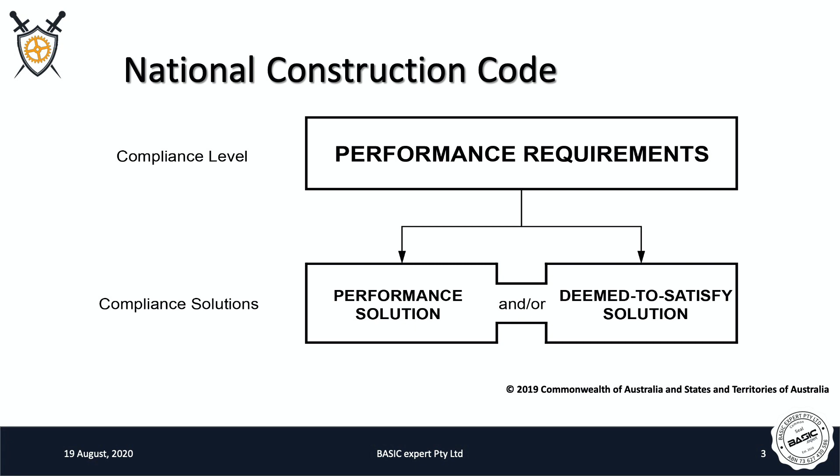Obviously, everything starts with the building code, and a reminder is not needed for this audience, but as you know, it's a performance code with performance requirements at the top, and you can meet the performance requirements either through a performance solution and or through a DtS solution, and that's the key of our discussion today. The performance solution either directly complies with a performance requirement or can be shown to be equivalent to the DtS solution.

Remembering that our whole topic is DtS safe, this could mean that a performance solution does not meet the performance requirement and is not safe if the premise that DtS isn't always safe is true. So that's an interesting thing.

Going back in time to the 1990s, this was the exciting time here. We had the second performance-based building code implemented in the world. The first was New Zealand. The UK beat both of us, but they didn't implement their performance-based code for a few years after us. We also introduced private certification. We got rid of the clerk of works. Those were exciting days and really the start of our current journey.

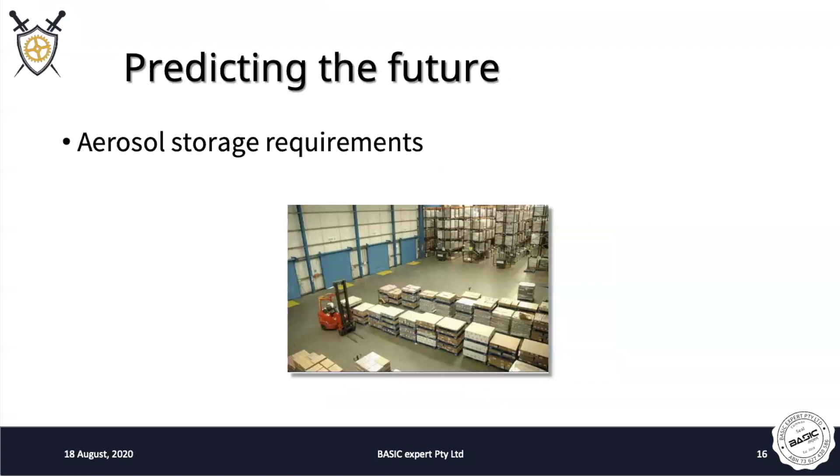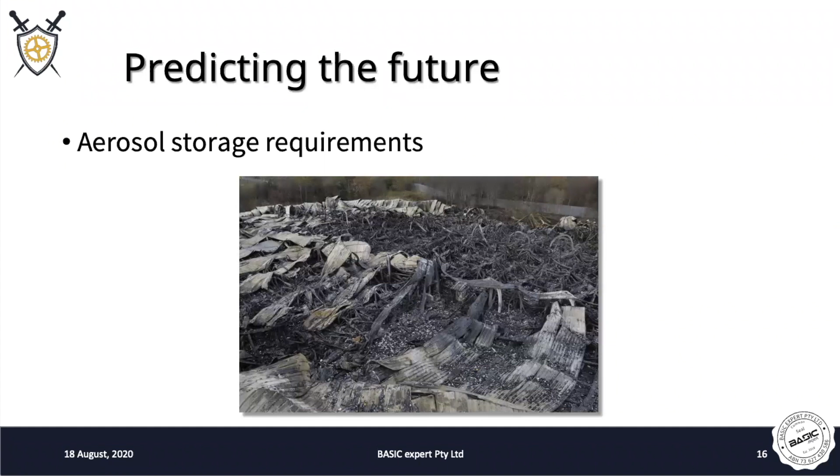So in 1978, we were busy getting rid of chlorofluorocarbons, obviously because of the problem with the ozone layer. And we replaced chlorofluorocarbon propellants in cans of paint, aerosols, with propane or butane. Kmart had a beautiful warehouse. It was sprinklered, it had firewalls, it had doors, and it had a fire. And the aerosols ignited. And because of the propane and butane, they became little rockets and the entire building burnt down. So our building regulations changed, and we now put aerosols inside a cage in order to make sure that this doesn't happen again.

So when we look at our building code, it was based on historic fires. It didn't account for new construction materials, right? So for example, when we looked at the 3-story low-rise construction on combustible construction materials, it was based on timber cladding back in the 90s when Vaughan Beck did the risk assessment, compared to new materials that we have today. It didn't account for new hazards and didn't account for updated engineering capabilities because we just didn't know that we would have FDS and all these amazing computer tools back when we wrote the code in 1990.

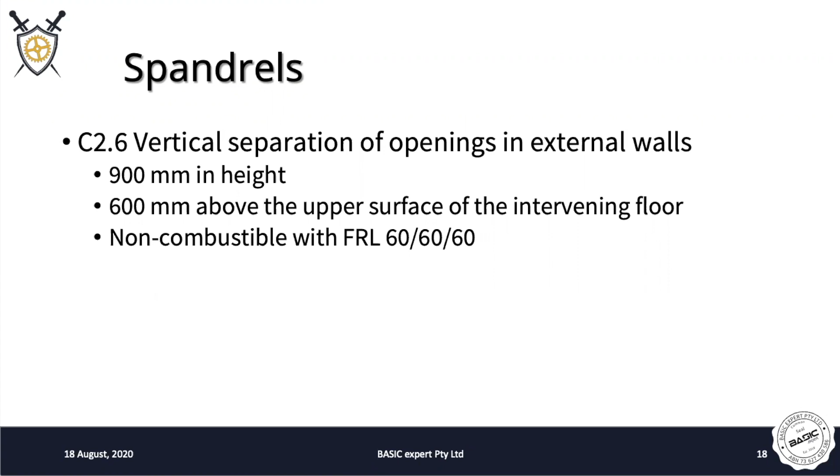Let's talk about a few examples where deemed to satisfy doesn't work, and then the panelists will have more discussion about this. So think about spandrels. The spandrel requirement is they need to be 900 millimeters in height, 600 millimeters above the upper surface of the intervening floor, and they have to be non-combustible. The problem is that 900 millimeters may not be enough. It depends on the shape of the window opening.

This is research, it's very old research, it's 20 years old. It should have changed the deemed to satisfy for spandrels, but it didn't. It was done in New Zealand, so maybe we just sort of ignore it because it was far across the sea. But the bottom line is research shows that 900 is not enough if you've got a tall, narrow window. And yet our building regulation still has a deemed to satisfy of 900 millimeters.

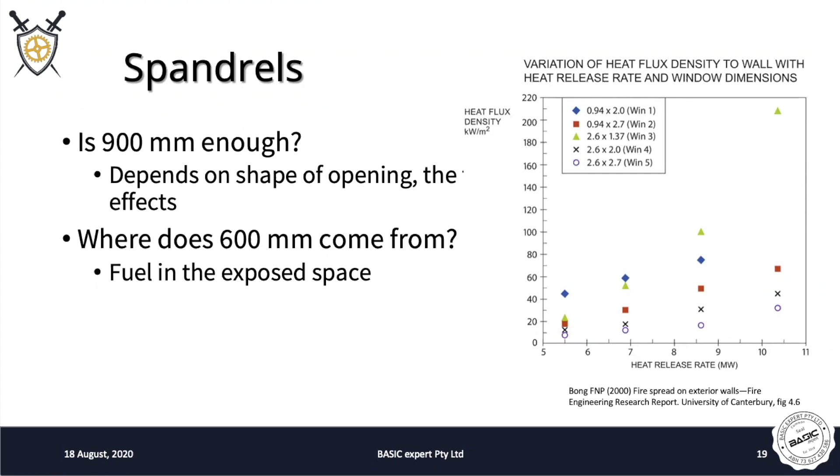Think about exit door swings. Exit doors need to swing in the direction of egress, but doors on the path of travel do not. But people still have to go through the doors, whether it's on the path of travel or the last door out.

So the issue is whether or not there's queuing, not which way the door swings and where it's located, but we should be looking at queuing, and yet deemed to satisfy says it doesn't matter if it's on the path of travel. Here's another good one.

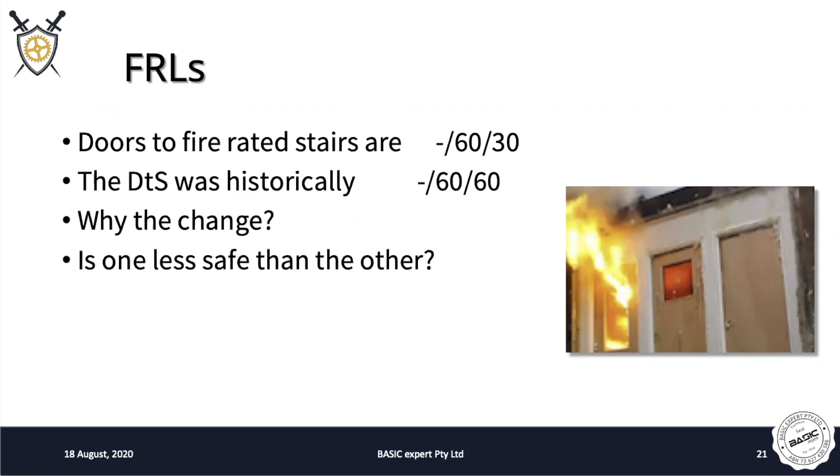Our current fire resistance level, FRL, for doors to fire rated stairs is -/60/30. It used to be -/60/60. Nothing has changed except to get the -/60/60 rating, we had asbestos in the doors. Well, when we banned asbestos, we found it was just too expensive to make a door that had the -/60/60, so we just changed the required rating. So that was a place where the deemed to satisfy changed, not because of safety, but simply because of cost.

While we're on the topic of FRLs, let's talk about AS 1530 Part 4. We just need to remember this is the test that determines the fire resistance levels. It doesn't test full-scale assemblies, but large ones. The test cannot predict time to failure in a building fire, though. It predicts time to failure in the test. So a 60-minute tested assembly might last 20 minutes in a real fire or 10 hours in a real fire, and yet it still has the same rating.

If we assume that it failed at 60 minutes and the door and the assembly, let's say a column or a beam, collapsed in 20 minutes, which is certainly possible, and we design for that, then the deemed to satisfy provision gives us the wrong information. Deemed to satisfy says it should last 60 minutes perhaps, when in reality it might only last 20. But it's okay because we have an old history of FRLs. It goes back to the 1880s. We should be comfortable about it.

It was codified about 100 years ago at the National Bureau of Standards in America, but those tests were done using railroad ties and furniture of the day, which were timber. How does that apply to the plastic desks that we have today and chairs and the like?

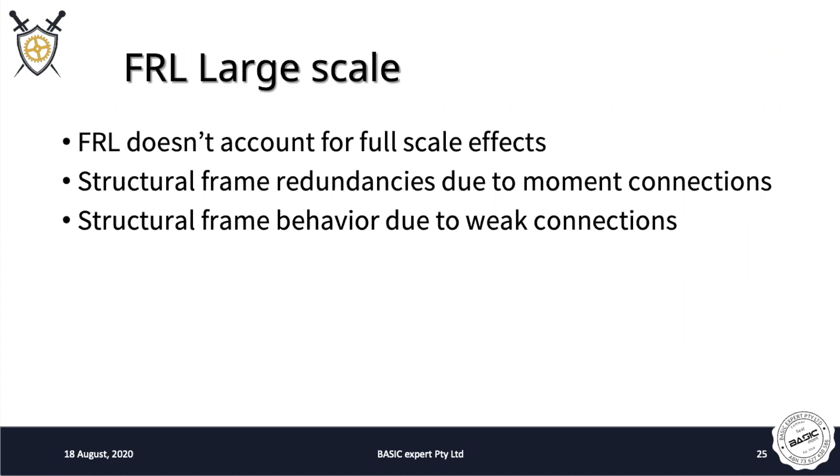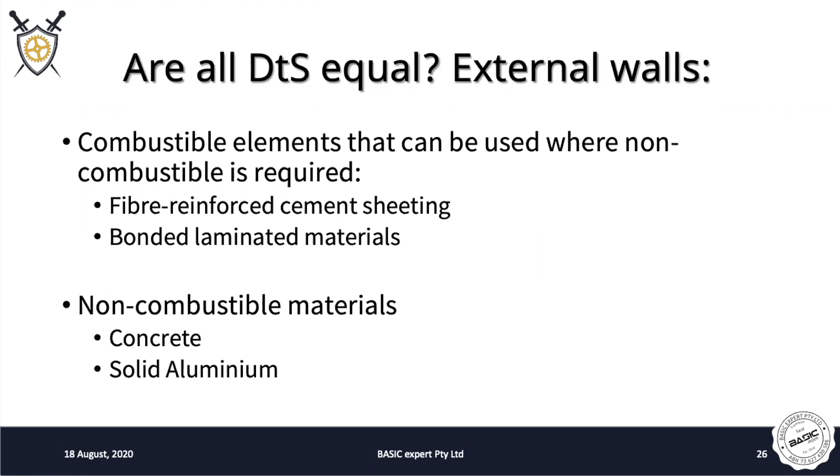Here's another good one. Are all deemed to satisfy provisions equally safe? Let's look at external walls. We're going to look at fiber reinforced cement sheeting, bonded laminated materials, concrete, solid aluminum. So the first two are combustible elements that are allowed to be used where non-combustible is required, such as in type A or B construction. And concrete and solid aluminum are used where non-combustible is required.

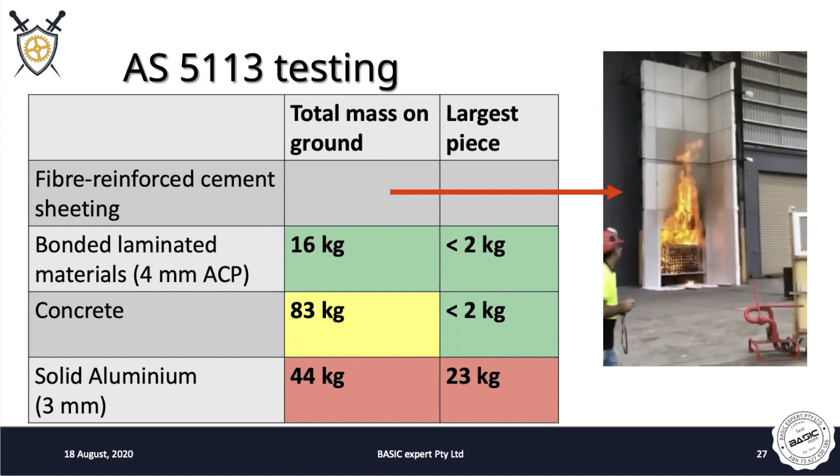Solid aluminum, which is the flavor of the month. So we're replacing products like Alucobond FR with solid aluminum sheets, which are much safer, except that when you test it to the full scale, we had one test where there were 44 kilograms on the ground, a 23 kilogram piece. You probably don't want to be hit by that, yet it's deemed to satisfy. It's kind of scary.

The deemed to satisfy doesn't require any design for egress if you're in a wheelchair or if you're disabled. This usually means that in the event of a fire or other emergency, disabled people won't have the same level of safety as others. And you or I could be disabled tomorrow. We can break a leg, sprain an ankle, and then we also will have difficulty going up and down a stair.

So I'm going to conclude with a couple of questions. First, do building surveyors have discretion to ignore the deemed to satisfy provisions and require more? The answer isn't as obvious as you think. The panelists will talk about that. What about fire engineers? From their code of ethics, fire engineers are required to be discerning and do what's right. They must act appropriately when they perceive something is wrong. Fire engineers must act if deemed to satisfy isn't safe.

But that's confusing, isn't it? Are we really required to build safe buildings? How safe is safe enough? How does a municipal building surveyor decide if a building is safe? When the authority having jurisdiction asserts that a deemed to satisfy building is safe, are they correct? I don't know. Let's find out what the panel says.